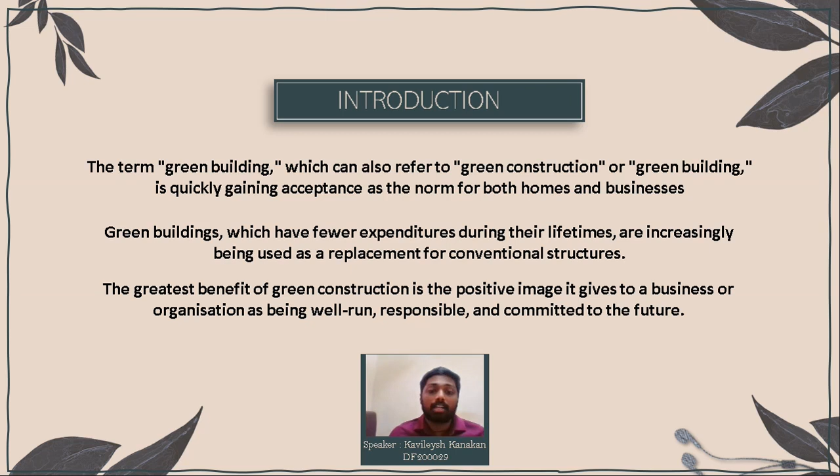The term green building, which can also refer to green construction, is quickly gaining acceptance as the norm for both homes and businesses. Green buildings incur fewer expenditures during their lifetimes and are increasingly being used as a replacement for conventional structures. The greatest benefit of green construction is the positive image it gives to a business or organization as being well run, responsible, and committed to the future.

Determine and evaluate the potential impact of this project on the local community, environment, and economy. Propose and discuss feasible, sustainable strategies that could be implemented throughout the project life cycle to achieve its objectives. Justify the applicability of the proposed sustainability strategies using multiple case studies of pertinent construction projects.

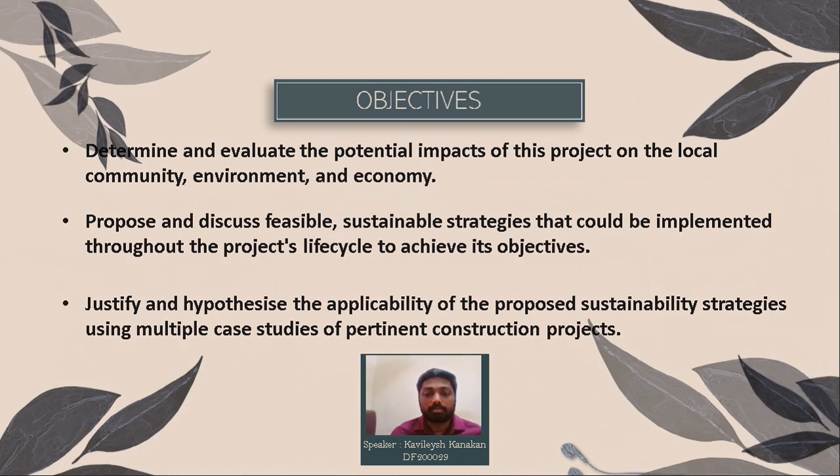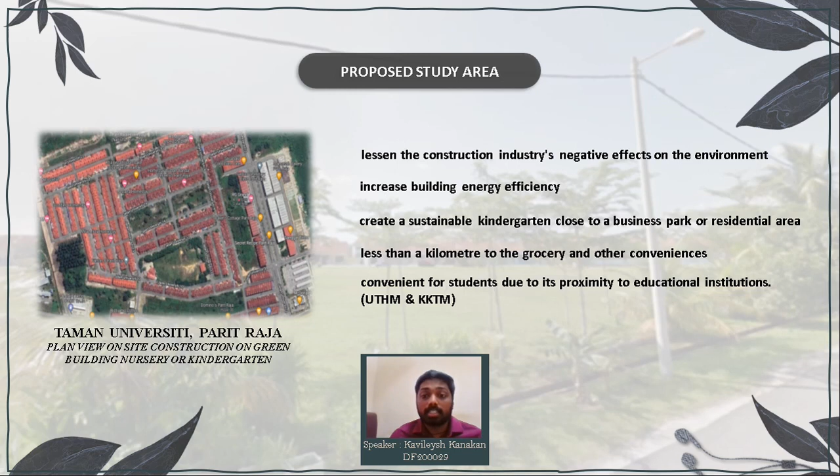Proposed study area: this is a plan view on site construction of a green building nursery or kindergarten. First, our motive is to lessen the construction industry's negative effect on the environment. Then we also focus on increasing building energy efficiency, and create a sustainable kindergarten close to a business park or residential area.

So we chose Taman Universiti Parit Raja, which is less than a kilometer to a grocery and other conveniences. Convenient for students due to its proximity to education institutions, which is UTHM, KKTM, and some other primary and secondary schools. Thank you.

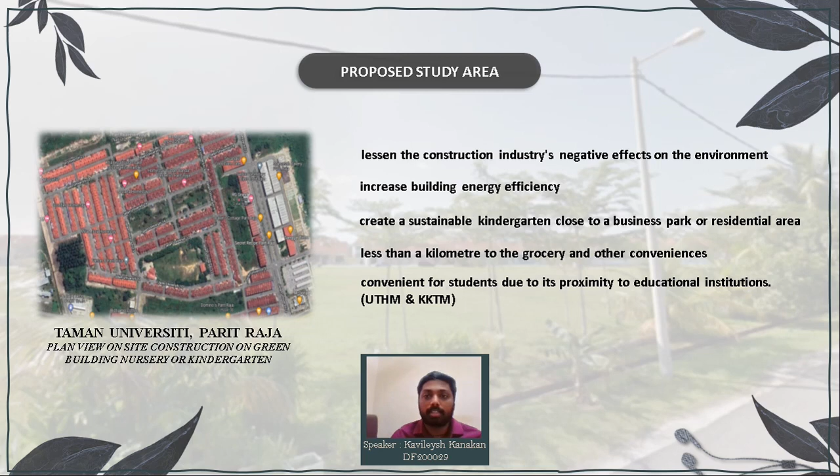For the local community, the project has the potential to improve young children's educational and social chances as well as generate jobs for the locals, all of which have a good effect on the local economy, as well as preserving the excellent quality of life in the area.

A more pleasant indoor environment can also increase productivity among employees. Employees' productivity rises when they are housed in healthy, environmentally responsible buildings.

For the environment, during construction, waste should be kept to a minimum and eco-friendly materials should be used. Compared to conventional structures, green ones use significantly less coal, which in turn lowers pollution levels. In doing so, they lessen the rate at which the planet's climate is changing.

Now I'm going to talk about economy. Economy can be increased when job offers increase. Construction workers, contractors, kindergarten teachers, and support staff including maintenance and cafeteria workers will be able to find more work during this project.

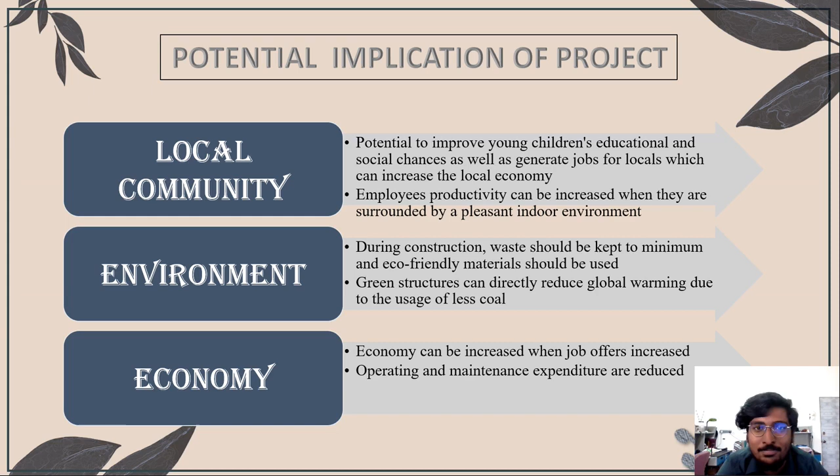There are 6 strategies that we discovered for our project. First is efficient energy use. Second is reducing waste disposal in construction. Third is green building index. Fourth is sustainable construction. Fifth is water recycling, and sixth is enhanced indoor air quality.

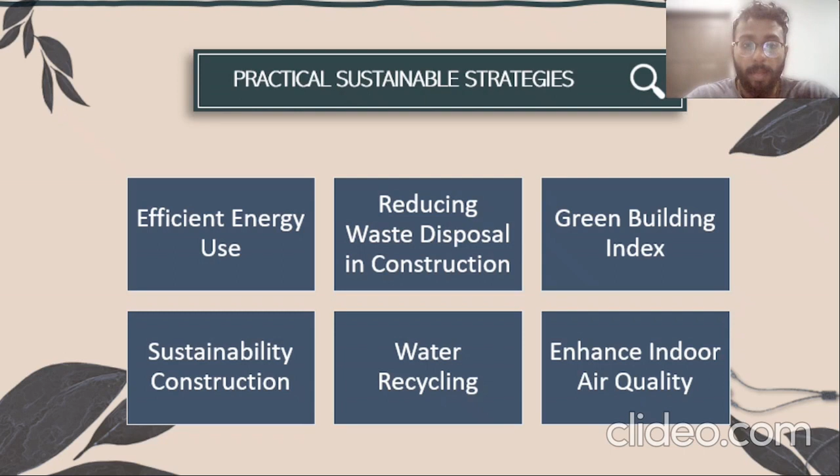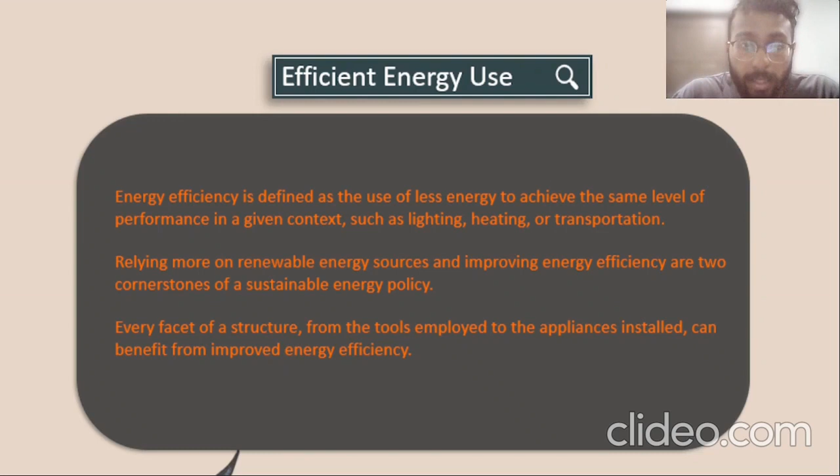Let's see the first strategy: efficient energy use. Energy efficiency is defined as the use of less energy to achieve the same level of performance in a given context, such as lighting, heating, or transportation. Relying more on renewable energy sources and improving energy efficiency are two cornerstones of a sustainable energy policy. Every facet of a structure, from the tools employed to the appliances installed, can benefit from improved energy efficiency.

The next strategy we discovered is reducing waste disposal in construction. Waste from construction projects typically consists of cardboard, glass, metal, insulation, roofing, drywall, cladding, or flooring, among other materials. The majority of these items can be repurposed or reused to cut down on the quantity of garbage that must be disposed of during construction.

The adoption of this environmentally responsible practice in the construction industry will result in a reduction in carbon emissions as well as savings in cost, and also a reduction in scrap and shorter turnaround times.

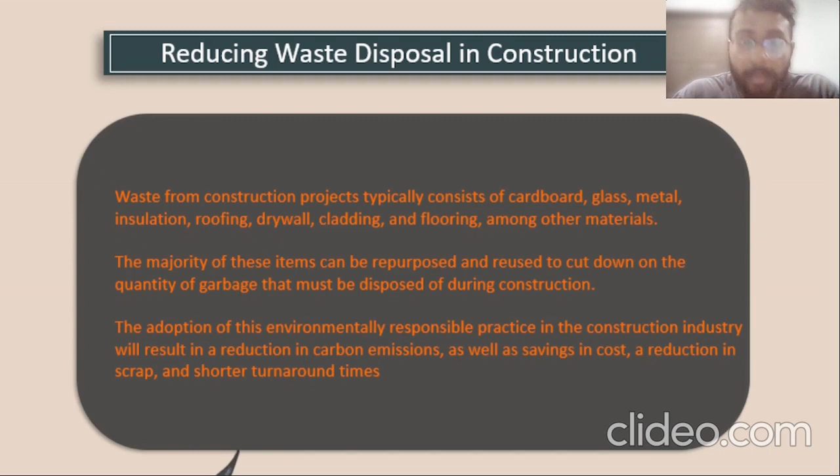The next strategy that we are looking at is the Green Building Index. Basically, the Green Building Index, also known as GBI, is a well-known green grading system designed to promote sustainability in the built environment. It also increases public awareness of environmental issues and fosters a sense of personal responsibility for the well-being of future generations.

Owners and developers of projects can use this tool to enhance their environmentally friendly building practices. By using the GBI method, we may assess a building's ecological footprint and design in relation to other similar structures.

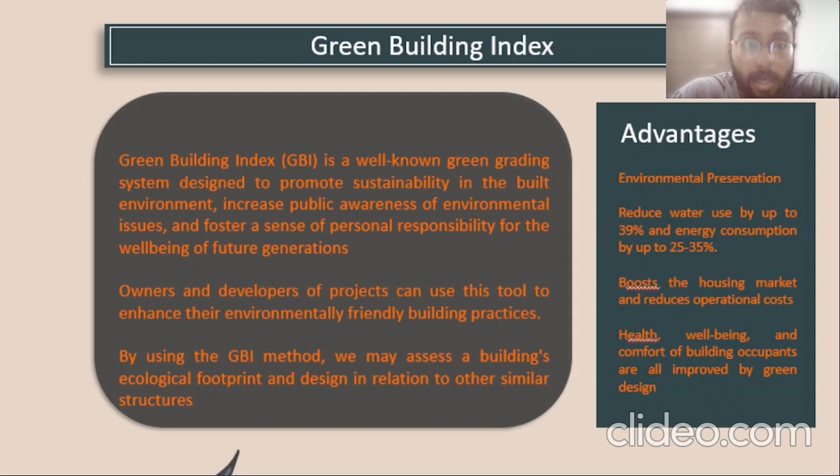When we look at the advantages of implementing the Green Building Index, first, it can benefit environmental preservation. Second, it reduces water use by up to 39% and energy consumption by 25 to 35%. It also boosts the housing market and reduces operation costs, and it benefits the health, well-being and comfort of building occupants, all improved by green design.

The next strategy that we are looking at is sustainability construction. Sustainability construction means reducing energy consumption and increasing the use of recyclable and renewable materials. Examples of sustainable building techniques: the basic objective of green construction is to reduce negative impacts on the natural world, which means sustainability construction or

environmental wise. So the implementation methods of this sustainability construction are: one, take advantage of as many eco-friendly components as you can. For example, we can use eco-friendly materials at the construction site. The second method is to make sure you only get what you need, plan what you need when placing an order. From this, we can avoid extra costs, and also avoid the wastage of products or

raw materials. And the third is to make good use of stuff that has already been made, which means recycling and reusing the materials that we are using at the construction site.

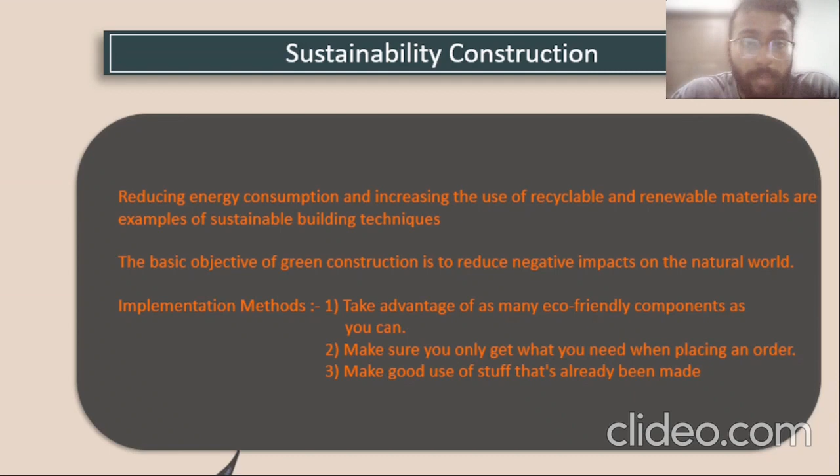And without delay, the next strategy we are focusing on is water recycling. Recycling water is the practice of reusing water for non-polluting purposes once it has been purified, such as in agriculture, car washing, landscaping, creation of wetlands, artificial lakes, etc. Natural processes or engineering systems can be used to recycle wastewater.

Wastewater recycling and reuse can have positive effects on both the economy and the environment, which means it can help with sustainable construction also. So by reusing wastewater, we can increase local water supplies, boost water quality, save energy, and cut down on wastewater disposal costs.

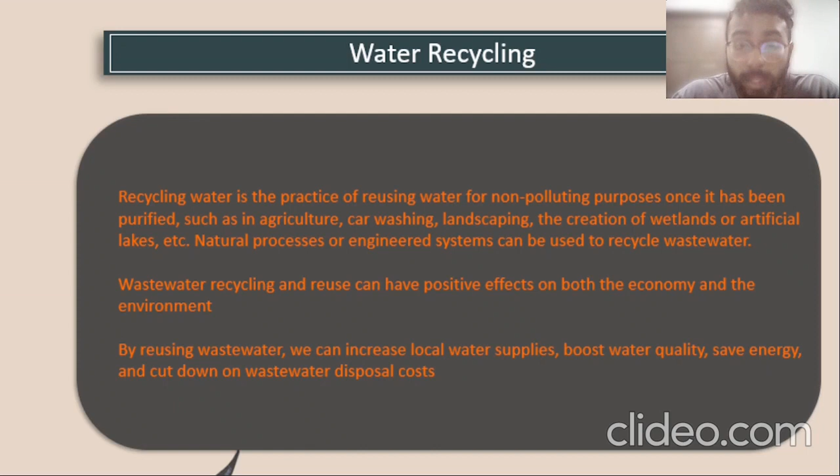Okay, last but not least, the final strategy that we discovered is enhancing indoor air quality (IEQ). In this case, when it comes to air quality, the comfort and productivity of building inhabitants, in addition to their health, are directly influenced by the IEQ, indoor air quality.

So it is essential to improve the building's acoustic performance and provide its occupants with access to lighting and temperature control via operable windows and ventilation systems such as extractor fans. Sustainable buildings that care about their inhabitants' health should prioritize the utilization of natural light as well as provide adequate ventilation and moisture management.

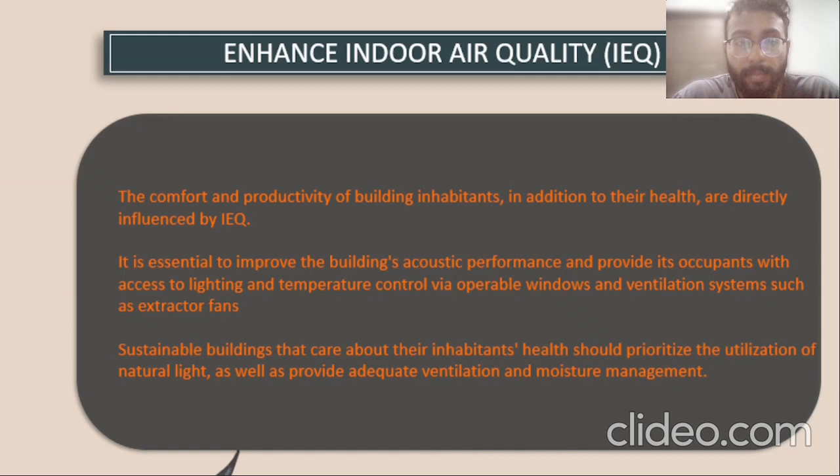Hi, I'm Naveen Trasilan Ramesh, and I'm going to explain the applicability of the sustainable strategies in the case study. The first strategy is to minimize the usage of raw materials and natural resources in construction. This is to promote the usage of recycled materials and resources, which is one of the approaches to solve the problem.

In Singapore, copper slag, which is a byproduct of concrete aggregates recycling, is now finding widespread application to make concrete. Not using sand in the building helps to keep it where it naturally occurs and reduces the need for sand mining. It is also strongly recommended that recycled material be used in this building rather than natural resources, so as to keep the environment sustainable and keep up with the Green Building Index standard.

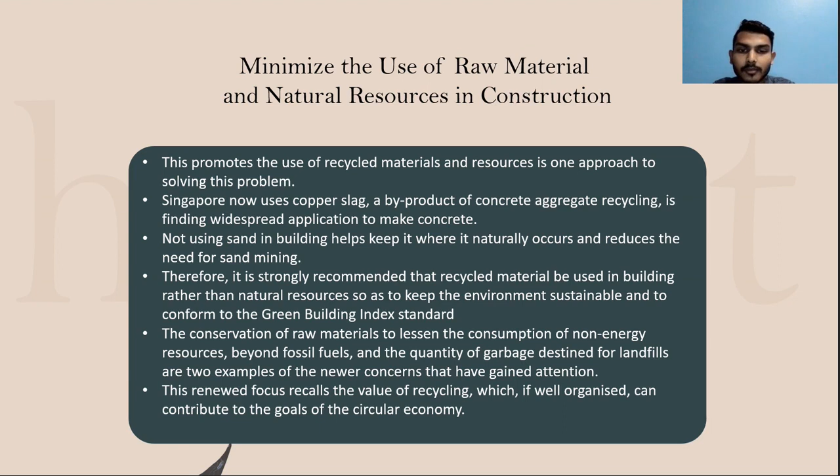The second application is adaptation of building information modeling (BIM) in the design. BIM is a methodology that incorporates either methods or technologies that can be used as a framework for building the designs of the building, and it also can be used in successful projects involving the construction of complex buildings.

When a business actively employs BIM, the level of BIM adoption and team awareness rises, and it also renders ineffective the usage of teaching and conducting workshops. And participation in the development of BIM strategies will help to keep the team members and colleagues actively interested in this project, and willingness and dedication are crucial to its effective adaptation.

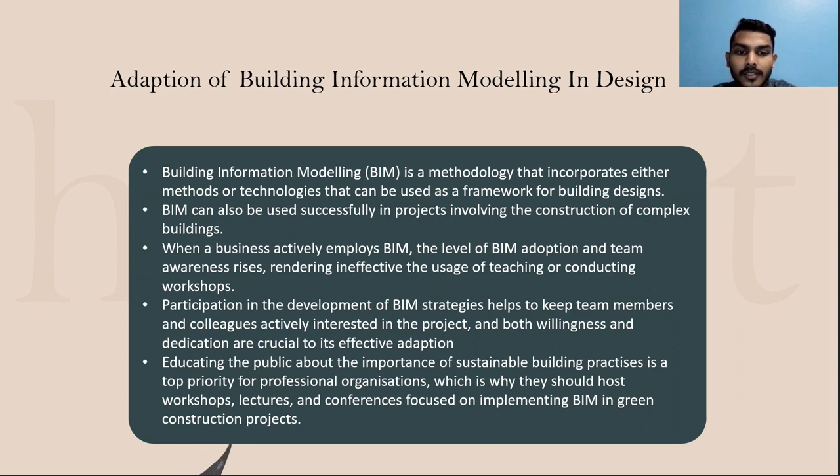Educating the public about the importance of sustainable building practices is the top priority of professional organizations, which should host workshops, lectures, and conferences focused on implementing BIM in green project construction.

The next application is the industrialized building system (IBS) in design, which is referred to as prefabrication, and it's also increasing in popularity in the construction sector over the past few decades. This technique is flexible enough to use on anything from individual wall panels to the entire building floor. The conventional technique of building involves constructing a structure from its individual parts at its final location, making the entire process transparent from start to finish.

The CIDB, which is the Construction Industry Development Board, has also been pushing for more widespread use of IBS on the grounds that it will improve productivity, save costs, reduce the need for imported labour, enhance workers' safety, and reduce the industry's negative impact on the environment.

IBS is also becoming increasingly common in traditional construction practices, which can simplify building operations. Population, public awareness, and developing capacity were highlighted by the authors as having potential to increase sustainability. These characteristics should be considered as an institutional requirement for introducing IBS.

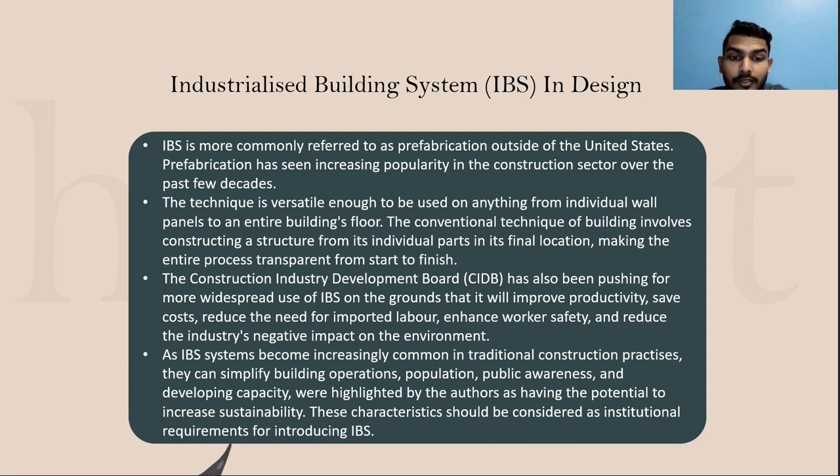So that's all for my part.

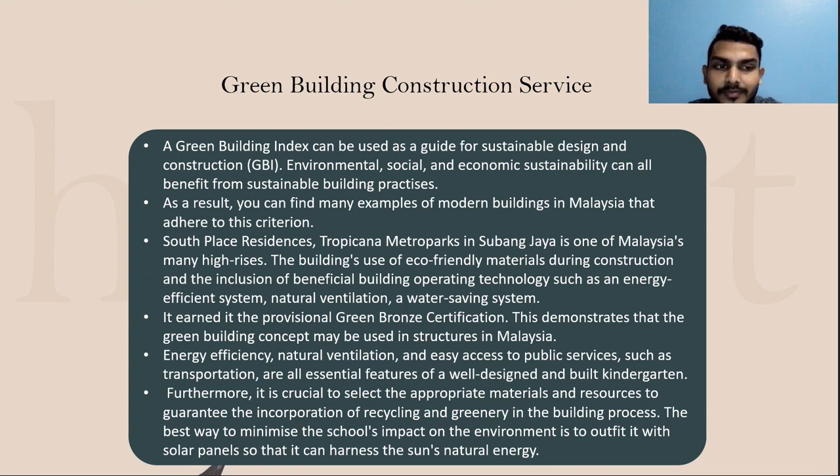Thank you. As for the conclusion, green buildings are meant to minimize their impact on the environment at every stage of their lifespan. Everything in the design may be taken apart and used individually to reduce waste. Popular green building standards have resulted in the certification of approximately 3.5 billion square feet of space. Green building is environmentally conscious and uses materials and methods that have as little of an impact on the natural world as possible.

Energy efficiency has been found to offer two major benefits to businesses: decreased emission of greenhouse gases and air pollution, and reduced energy costs. The benefits to society are enormous. In this report, we look at the importance of sustainable construction management (SCM) to both the theoretical and applied facets of civil engineering. The report thoroughly follows all the instructor-provided guidelines and criteria because we gathered and considered a wide range of perspectives. Thank you.